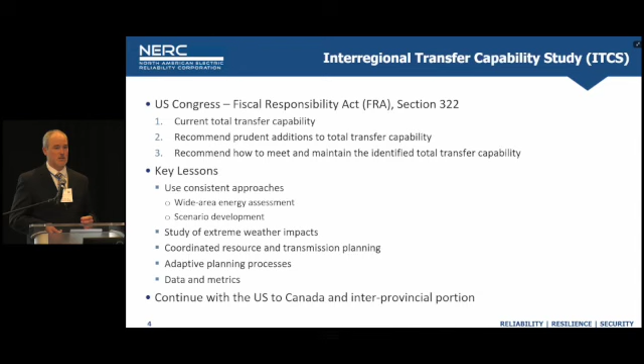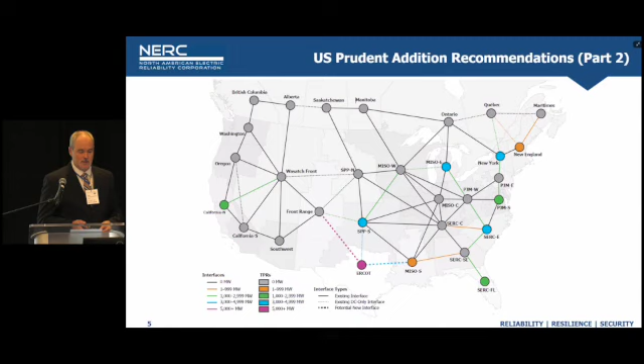Let me jump back where I should have started. This past March, NERC, in conjunction with Section 6, the Power and Energy portion of the National Academy of Engineering, held a workshop with about 50 leaders throughout the US, Canada, as well as Europe. And the key point was to look at energy adequacy for transmission and resources.

It was very good, a lot of good presentations, a lot of good technical information, but we received perspectives on the obstacles that those leaders have in managing all the components of the grid, not just the planning and the things we do in our daily work, but understanding the bigger picture.

Out of that workshop came 9 actionable items or recommendations, and they're very key points. Some of them are sort of closely related, but basically it's very similar to the interregional transfer capability study, in that you have to have some consistency. You've got to make sure planning and the resources and transmission actually talk. And then look at the duration and magnitude of load loss when you do the planning.

A lot of you in the room may be familiar with the loss of load expectation, the 1 in 10 criteria. It's a good metric. It's relevant. It's still there. Still should use it. But it's really not sufficient in today's world when you have the uncertainty in resources. You have to look at other items like the expected unserved energy and also the normalized version of that, which looks at total load for an area. Those give you other ways of measuring and understanding what the potential for load loss is.

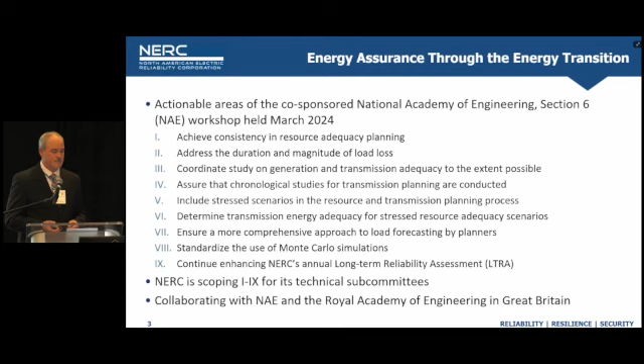Lastly is the IBR, or Inverter-Based Resource Initiative. I spoke on this last year as well. It's well underway. The main reason we're doing this particular initiative is because it was revealed that traditionally, historical resources met 97% of the total resources under standards, the nameplate capacity. Flip the coin to the IBR side, and only about 84% of the nameplate capacity had to pertain or be mandated to use the standards.

The registration we're doing under our NERC rules of procedure is going to allow us to register what we're calling Category 2 to be applicable to the NERC standards. That's underway. We're identifying, and we'll begin registering later, mid-2025, and then have everyone fully registered by the middle of 2026. There's a lot of good work there.

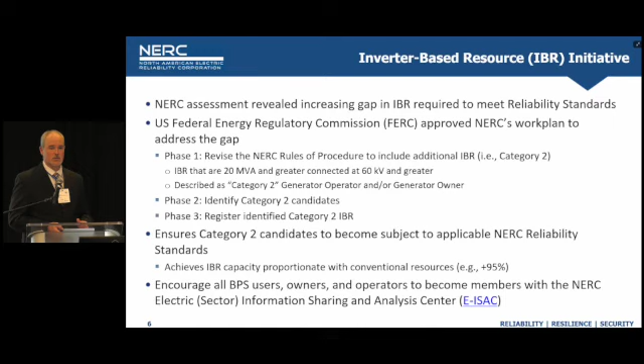I'd also like to put a plug in for our Information Sharing and Analysis Center. You can be members of those. It's voluntary, there is a charge for it, but it gives you a lot of information on threat intelligence.

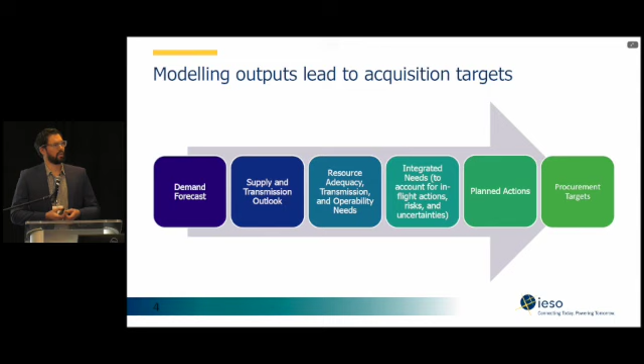Those result in planned actions, which is essentially a shopping list for the characteristics of resources that we need, and then they lead to procurement targets through a series of resource agnostic acquisitions.

So the first challenge that we have with acquiring new resources to meet our needs is right-sizing them. On one hand, you can overplan and have a very reliable system, but it's going to be expensive for ratepayers. We're also obligated to minimize costs to Ontarians for their electricity.

So we balance cost and reliability through a cadenced series of procurements that really captures the idea that nearer term, you have a much better idea of what's happening in your power system, and as your models go out longer and longer term, the uncertainty increases.

So moving backwards chronologically, we have our longest term acquisition targets. That's for greenfield development of new resources. We set targets for how much we would want to acquire every few years or so through the long-term procurement mechanism. We had our first long-term procurement where we acquired about 3,000 megawatts of storage.

And then looking forward at actually tomorrow, there's going to be a stakeholder engagement session on our second phase of long-term procurement, if anyone's interested in attending.

Then as we get closer to the operating time frame, we have our medium term procurements. This is largely looking at extending the life of existing resources, whether that's through upgrading the resources or accepting the resources as is if there's economic life beyond their initial contract life.

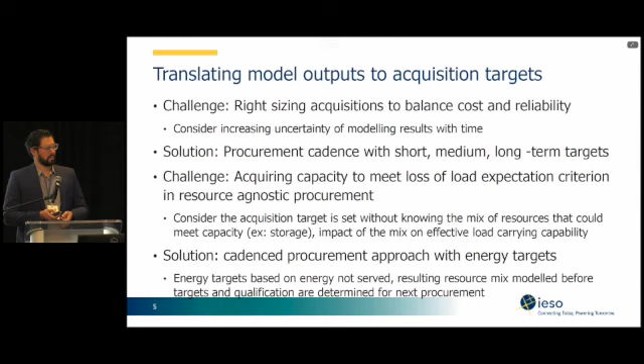We'll shift a little bit nearer term to the operating time frame. So we're still about 18 months out. This is the time frame that we look at for our outage management planning.

And this is where we see a lot more of the practicalities of climate change uncertainty, and understanding what the system looks like when you stress test it with certain conditions. So from when the Ontario market opened until about seven years ago, we used to look at a deterministic analysis of here's our load, here's the supply we have to meet our load. We had two scenarios: a normal weather scenario that looks at median weather and median hydrology conditions, and an extreme weather scenario that looked at extreme weather and what the hydrology conditions look like under extreme weather.

At the time, we didn't have significant solar and wind on the system, but since then we've added more significant solar and wind resources. So we used to approve outages based on whether or not there'd be enough resources above requirement for that normal weather scenario.

And then we transitioned to looking at the extreme weather scenario to capture a lot more of what can be happening on those peak days, especially during the summertime when it might be a really hot period of fairly dry weather that we tend to get in Ontario during the summer, and you may have issues with your hydroelectric resources simultaneous to increased demand from space cooling. So we shifted to looking at the extreme scenario.

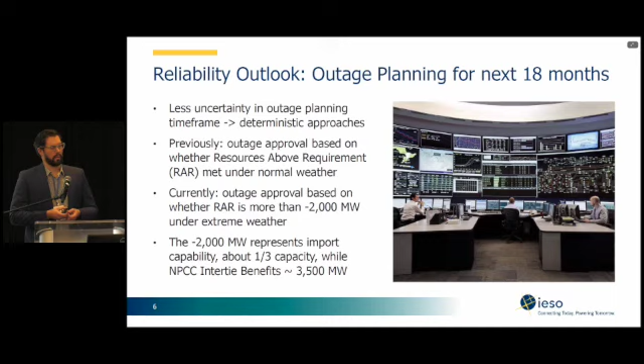Thank you, Mike. So during my presentation, I saw a few heads shake about loss of load expectation. How many planners do we have in the room? Few. Okay, great. So you can relate to what Mike was covering, right? Yeah. Okay, excellent.

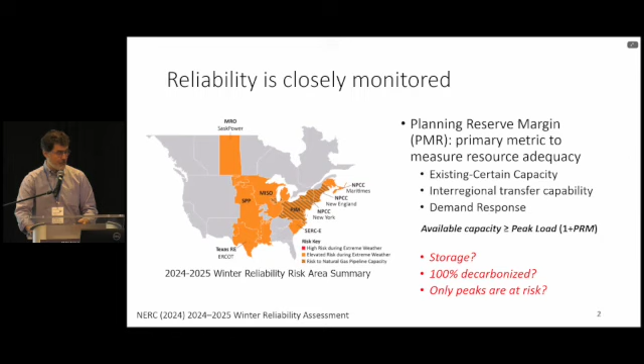In our study, we're actually not looking at just peak loads, because in a decarbonized sector, it's not only for the peak loads we want to have additional capacity. It could be for other times where you may have less of the variable resources. So during these non-peak hours, do we still have reliability? Because if you have fluctuating variable renewable energy capacity, then you may also have some issues meeting your load, even if it's not the peak load, because you have low resources. So that's why we are looking at that. So our approach is linear deterministic, but we're looking at the full 8,760 hours of the year.

So in a way, it's like a Monte Carlo analysis where you have so many cases, but for each hour, we want to make sure there's enough capacity to meet load. We include all 5 larger regions of the NPCC. So we have, again, 8,760 hours. We also have hourly wind and solar profiles for every region, so we use them as deterministic, but again, we have the full real fluctuations of generation from wind and solar in all 5 regions.

And then we can invest in generation, interties, storage, demand response. But we don't have unlimited capacity to invest. There's only so much we could add. So we do have upper bounds for our investments, which I think is key to understand because, of course, if you can invest an unlimited amount, then maybe the model works. But in real life, it's not true that you can build an unlimited amount of anything.

And we do operate Quebec's hydro systems with storage. Of course, that's included, and it's very helpful in many instances. And we do allow for natural gas, but 100% decarbonized means that it's either renewable natural gas or natural gas with CCS with additional costs, but we do account for that.

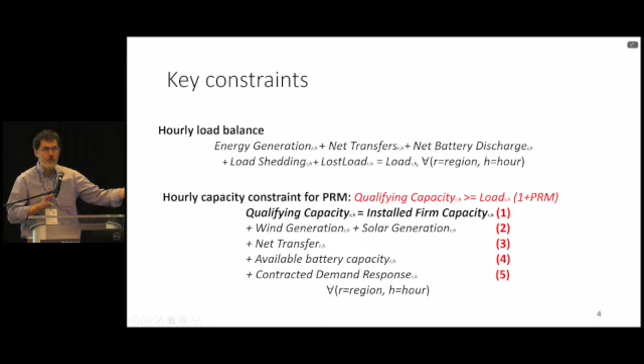What we're using in our study is basically the real hourly generation from wind and solar. So whatever is produced in one hour can be used. So it's like if we had perfect foresight of the full year, and when it's fully working, we're using 100% of the capacity. If it's not working, then it's 0. So it's fully fluctuating across the year.

Net transfer: we don't model a firm capacity for interties. We also look at what if we could know exactly how much would be coming in an optimal system. We count the net transfer between regions as being qualifying capacity.

And we use battery capacity, but for battery capacity there are two criteria. The energy has to be in the battery and the discharge capacity has to be there. So we use the minimum of the two amounts, the amount of energy that is available or the discharge capacity of the battery, so we are sure that there is energy if we count it. And the demand response, the contracted demand response that I showed you.

So basically we're running different scenarios in different ways. So it's really interesting what's happening with these slides. It's a mystery to me.

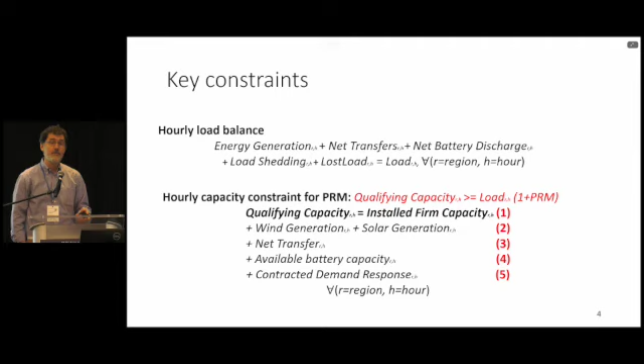So we're running scenarios where what counts as qualifying capacity evolves. In some scenarios, we only have the base case, where just the firm capacity counts. Then we have scenarios where transmission counts, where storage counts, and where demand response counts. So in the scenarios we're analyzing, we're adding different levels of these qualifying capacity tools. These are the flexibility mechanisms that we can add and include in our analysis.

And then we're also putting in three different large categories: can we add more natural gas? Can we just freeze natural gas capacity where it is now? Or, as some people sometimes claim, should we get rid of all the natural gas? Because in a decarbonized world, maybe we shouldn't have any natural gas power plants.

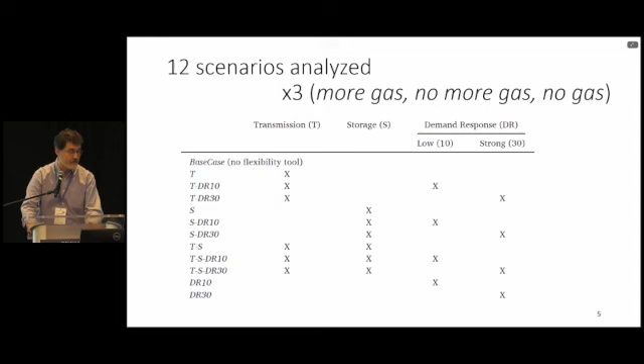So we are doing all these kinds of cases. And what we find is that you cannot reach some reliability reserve margin in some scenarios. So if you basically don't allow any of the transmission, storage, and demand response in your system, even if you add the maximum amount of natural gas power plants, you cannot get the reliability margins that you are looking at just with the base case.

So basically, there's not enough capacity in natural gas to offer you the reliability margins you want to have. You need to include some transmission or some demand response and storage. And of course, ideally, and that's the two lines with the full green under all scenarios, you can get up to 30% reliability margin, but only if you have transmission, storage, demand response in your tools

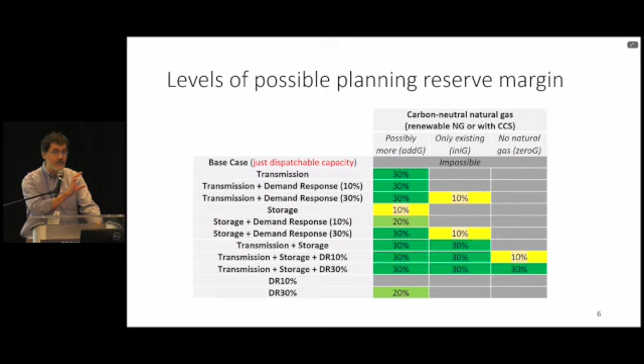So of course, if you add natural gas, the cost drops to a much lower level, and these are the kinds of levels. So this is a zoom to the lower levels. When you can add natural gas, you have costs that are around 180 billion per year, but that would mean adding only natural gas without the other tools, beyond what is acceptable in our model. So that's why it's written, we would need 97 gigawatts of additional natural gas power plants in the region to be able to meet our reliability margins only with natural gas power plants or only with firm power plants.

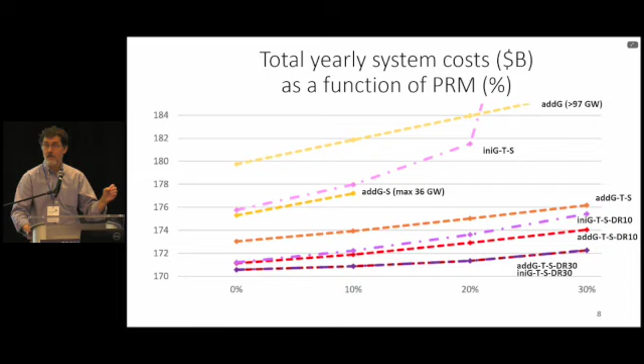Hydro is included there. And as we want to lower the cost, we need to basically have natural gas, but essentially more counting transmission, storage, and demand response. And the more demand response you have, the lower the cost to achieve your reliability margin. And that's basically a big call to increase the flexibility of all users in the system to reduce their load, because unless you have that flexibility, you don't reach your reliability margins as you want.

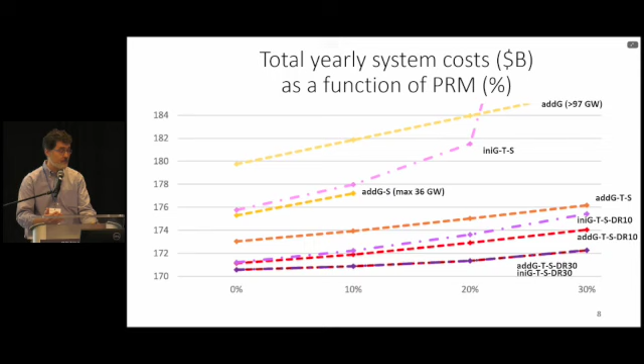So just to conclude, flexibility resources should be viewed broadly for reliability purposes. We need to include transfer capability, storage, and demand response. The three of them are very important to have. And if you don't include them, then basically your costs are going higher. And if you don't include your neighbors, then of course the costs are also going higher.

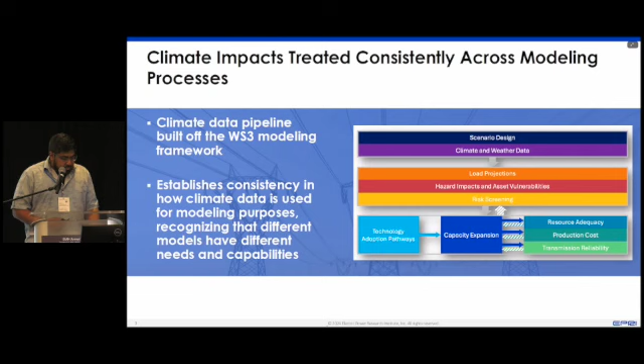The first step in a planning process is typically scenario design. Scenario design is defining the assumptions of how key uncertainties may evolve over a future. Typically, scenarios that people consider are techno-economic uncertainty, supply chain uncertainty, fuel supply, and policy demand.

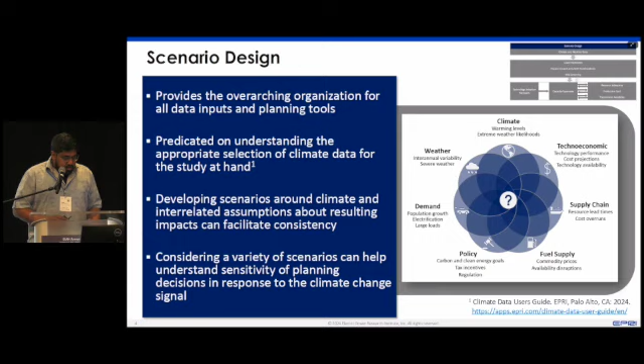One way to think about including climate data is just treating climate and weather data as additional scenarios on top of your existing scenarios. This does increase the problem space, and we'll talk a little bit about the consequences of that.

When you take into consideration this kind of climate data, you're considering meteorological and climatological conditions, such as temperature, precipitation, humidity, wind, and solar irradiance. For future projections of this data, that can include weather forecasts, extrapolated historical trends, and projections based on global climate models.

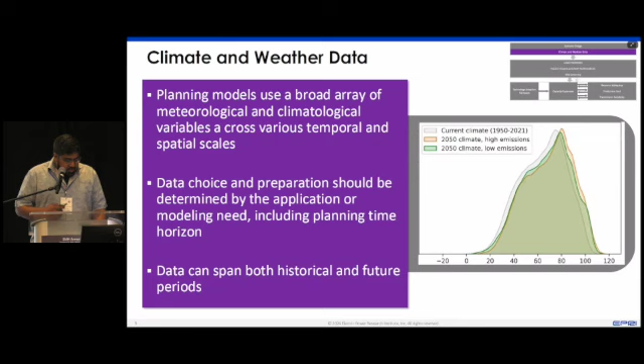Generally speaking, there are 2 kinds of transformations you might want to perform across different models for climate data: spatial transformations and temporal transformations. The outputs of one model are fed into another model, so you want to make sure that the transformations are consistent across different models.

For these kinds of transformations, if you have highly granular data, you're upscaling the data, or if you don't have enough resolution, you're sometimes downscaling it to make sure you have enough information. There are some trade-offs here as well. If your capacity expansion plan does not take into consideration a nodal model, then it may not make sense to include climate data at a nodal resolution or at each weather station. So it depends on the resolution of the various other models involved as well.

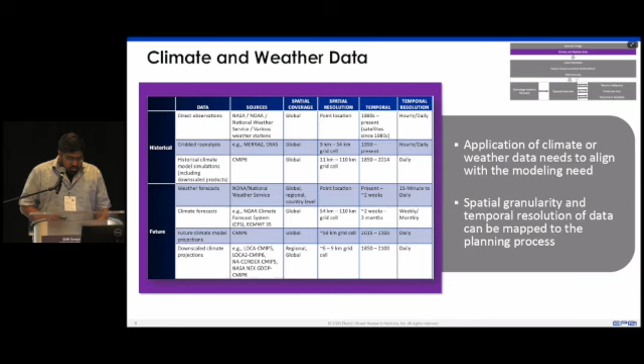Once we have this kind of transformation pipeline set up, we have to start identifying what extreme weather events are. This is the first step, and it's highly system dependent. In Texas, for example, an extreme weather event is high temperature, but this is system dependent. A gas turbine in Texas may have high temperature as its extreme event, but that same gas turbine in Ontario might have a very low temperature as its extreme event.

There are weatherization measures you can perform on these different assets to make sure they're not affected by these extreme events. So we want to identify what these extreme events are, and defining what an extreme event is is still something that the community is kind of forming. What we've done here is identify some thresholds based on magnitude, intensity, duration, frequency, spatial coverage, and even occurrence.

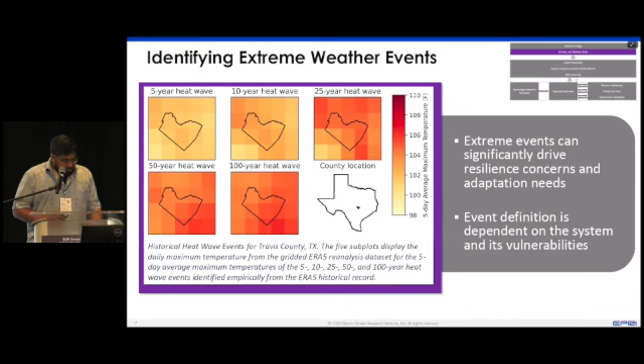So now that we've identified what an extreme event is, we can start pulling that climate data into our models. The first step is typically load projections. Most of the time, load projections are based on historical data or weather normalized conditions. But let's say hypothetically you had a bottom-up model that captured projections of end-use technology.

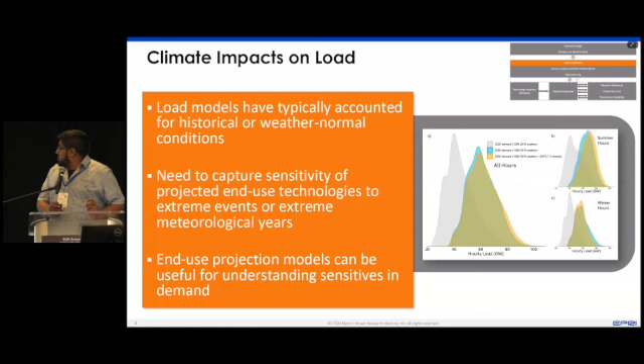So the next step, after you have these load projections, is typically to identify, given some extreme event, how that affects the various assets on an electrical grid. There are transmission system assets, transmission lines, and generation assets, different generators, and there are various vulnerabilities that different types of generators might encounter.

For example, a solar panel in heavy snow conditions might just have a cover of snow, which can take its generation down from 100% of what it could generate down to zero. In Texas, for example, higher temperatures can end up derating plants, meaning you may not be able to run them at max capacity.

I think Pierre had an equation showing the installed capacity or the capacity available. Imagine that equation, but now the capacity available in your capacity expansion plan is not as much as it could be because of some extreme event, since your generators have been derated. So you may not be able to meet your reserve margin because of that.

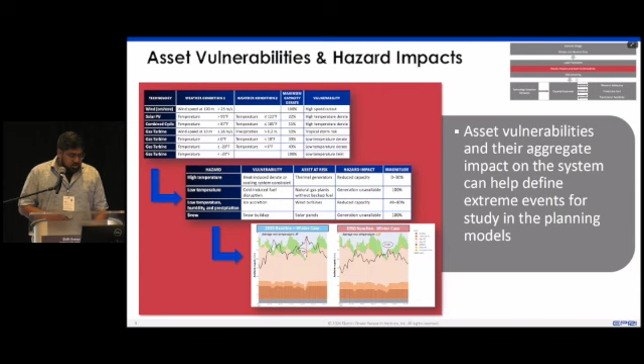With this kind of additional scenario, you may blow past your computational budget for solving this type of problem. That's where we've introduced risk screening — basically identifying key periods where the system is more likely vulnerable to not being able to meet the load given some supply based on weather conditions. This is somewhat like a resource adequacy model, but it uses weather data to determine whether these generators, if derated, are still able to meet the supply.

This is just identifying the period. You can see in the graph at the bottom left, there are all the weather scenarios, but on the right, there are some key time periods that have been highlighted based on the outputs of this risk screening model. These key time periods can then be used in your capacity expansion model or resource adequacy model to make sure your system has the supply to meet the demand in those time periods.

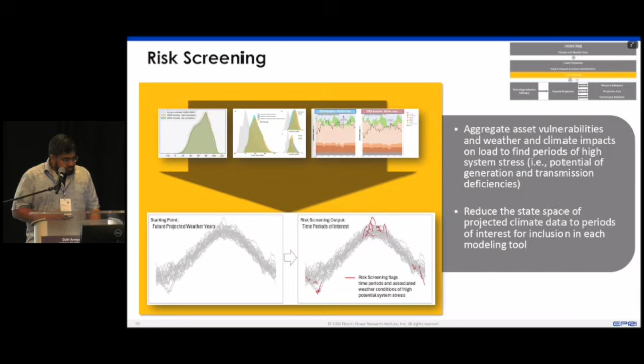Once you have this screening model that identifies these high-risk periods, they can be passed into the investment planning model, the resource adequacy model, and the production cost model. You can see again at the bottom of this graph those key periods — for the capacity expansion plan, you might only take into consideration a subset of that. But for resource adequacy, you want to consider as many scenarios as possible to make sure you've covered a diverse range.

You might run your production cost model at a higher fidelity, and that could give you better results about how the climate data affects the system.

In summary, having climate data that's consistent across these different models is important, and identifying what the extreme events are for the particular system is crucial because they're all highly system dependent. Understanding how each asset can be affected by climate data or these extreme events is also key. Finally, identifying those key risk time periods is what makes this problem computationally tractable.

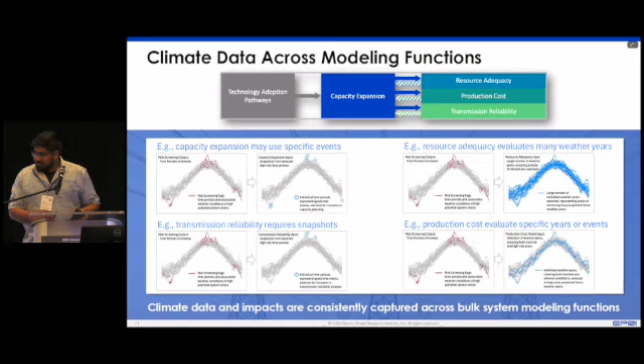Thank you, Deepak. Definitely shows some areas of risk that are not where you'd expect them sometimes.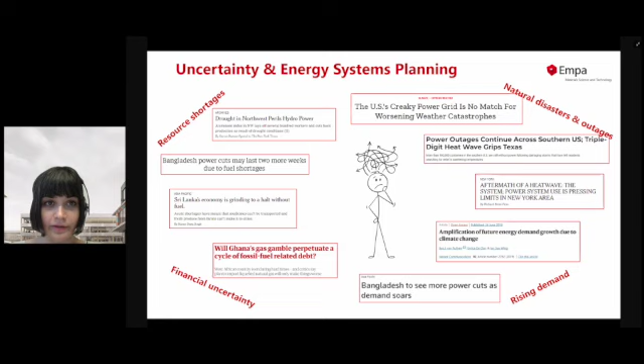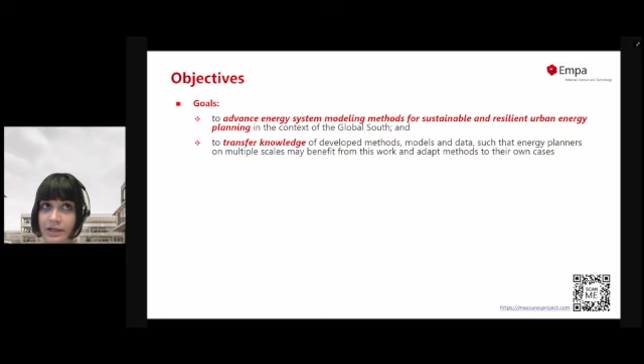The objectives of this project, called the Measures Project, which is about transforming our modeling approaches for more resilient and sustainable planning, is to develop these methods. We looked at it in the context of the Global South, given the climate vulnerability of communities, especially coastal communities, like the case study I'll show you today. But in this project, as I mentioned, it's meant to be transferable methods. We're creating general frameworks, and we wanted to transfer the knowledge, methods, models, and data we developed to energy planners worldwide so they can also benefit from this work.

What we focused on in this project is representing factors that are not typically well covered in the scope of energy system optimization models for long-term capacity planning, looking at socio-technical factors, techno-economic factors, climate change impacts, and overall how to improve resilience.

Specifically, we looked at things like extreme heat, flooding from the climate change perspective, and changes in hydropower. From the economic perspective, we looked at something called the informal economic sector, an economy that operates informally, with figures not officially accounted for in GDP, and how that affects your energy planning. We also looked at currency depreciation and how it affects planning, suppressed energy demand, power system failures, and all sorts of things.

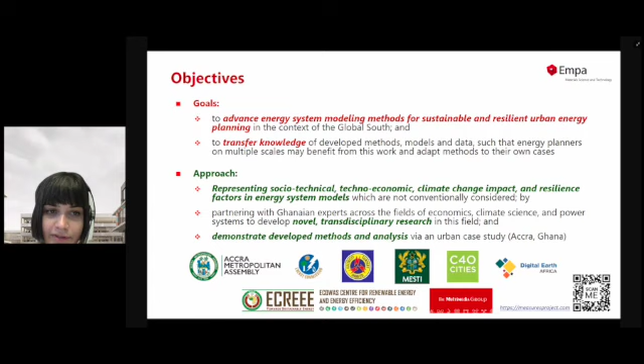We worked with a very transdisciplinary group of researchers across economics, climate science, and power systems, and we were the energy modelers in this case, developing these methods. We collaborated with a whole number of different organizations and research institutes in this project. Our workhorse for this was building a model for our case study area, which was in Accra, Ghana, which I didn't mention very clearly, I think.

So we were working on this case study, and here we used OSeMOSYS, which is an open source, open access modeling framework that some of you may have heard of before. The spirit of this project was to be open in nature, so we used this open access model, which built a model from 2020 to 2050.

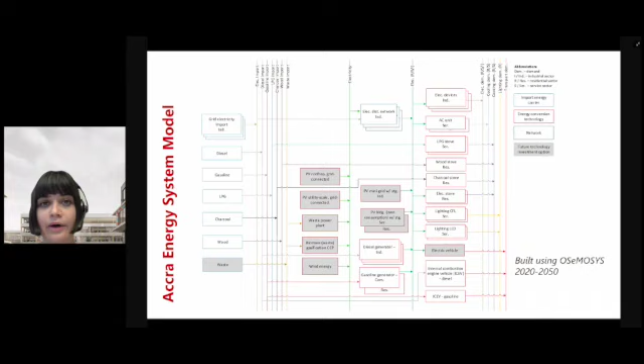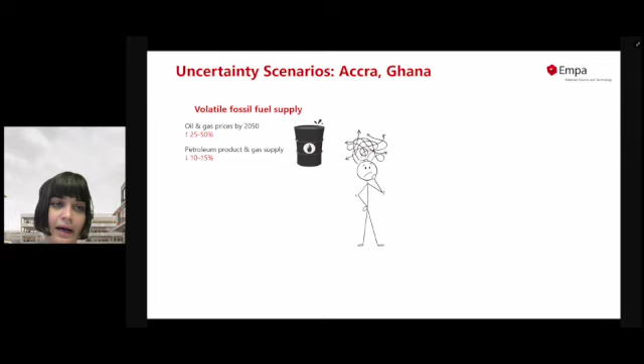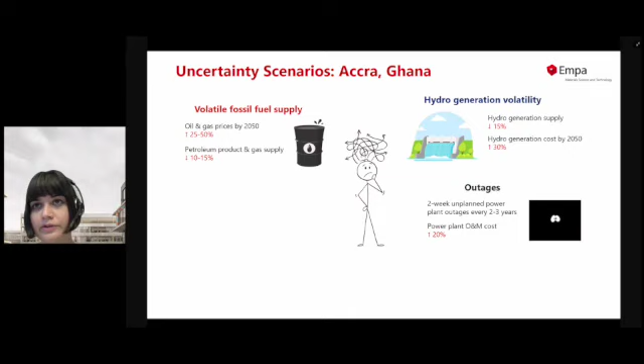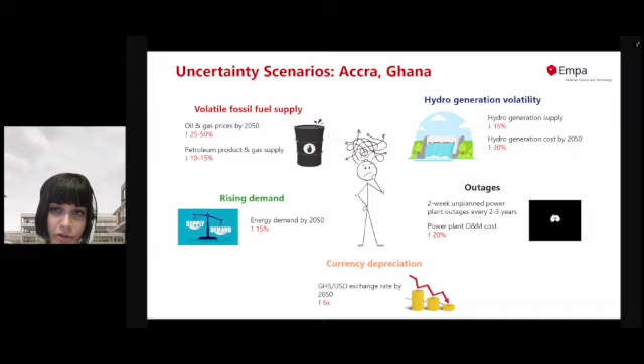We looked at this time horizon until 2050. Particularly for this, the uncertainty scenarios we looked at for the case of Accra were volatile fossil fuel supply based on historic trends, and volatile hydro generation, which is more applicable in the case of Canada and Ontario. We also looked at unplanned outages, currency depreciation impacts over time and how they can affect long-term planning, and rising demand because of things like increasing cooling demand, or rural-urban migration under different climate change scenarios from the IPCC.

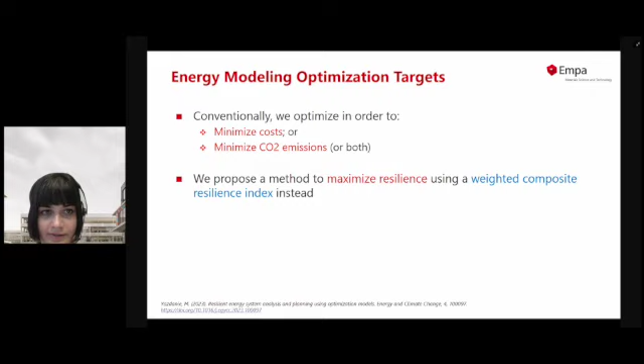What we did in this paper is we proposed a method to maximize resilience instead as an objective, using a weighted index. That weighted index considered different factors of resilience: looking at the balance of generation across different technologies, your security of supply based on your resources, the level of decentralization you have, the variety of technologies you have, the redundancy you have in a system, and the efficiency and CO2 emission reduction as well, which is more of a long-term sustainability and resilience target.

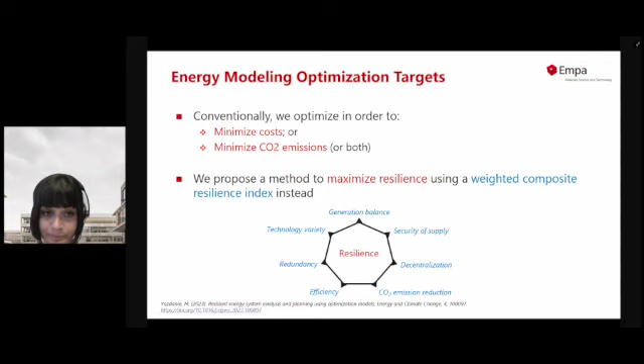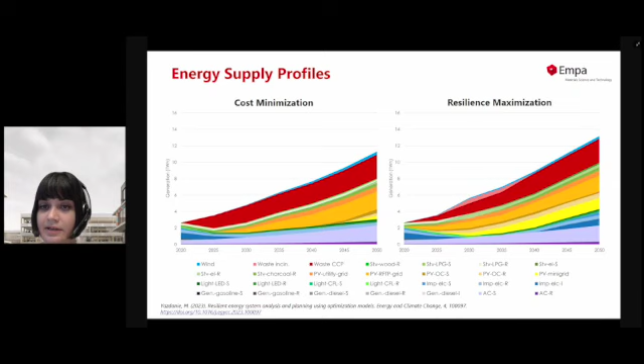Here, in one snapshot, I show you what the cost savings are of our resilience-optimized system compared to the cost-optimized system, looking at an uncertainty scenario in a given year of 2050 and what it would cost. On the far left side, you see the total system cost is about 40% more expensive to design the resilient system, but that's over the entire lifetime from 2020 to 2050. The other five bars show what the costs would be in one year when you have different shock scenarios, like the volatile fossil fuel demand increase, outages, and when you have multiple shocks causing cascading effects.

In one year, we have a cost savings of about $4 billion US, which covers more than the entire cost of the investment of the system. So one of the key messages here is it's worthwhile designing a system for resilience, even if that doesn't appear cost optimal when you just look at a cost-optimal objective. In reality, it can save you a lot of money. This is just a snapshot of one year, so you can imagine over several years of uncertainties what the cost savings might be.

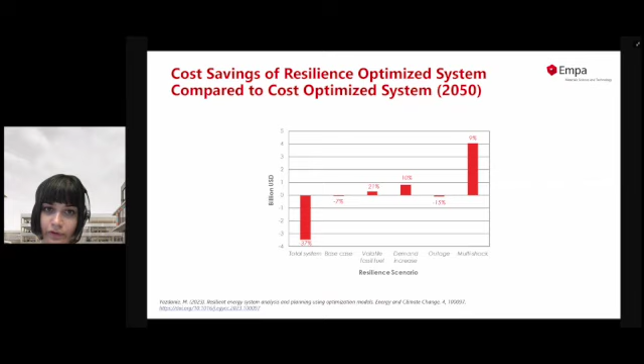That's one paper, and I'm going to quickly show you a second one, which is on strengthening energy system resilience planning by using a concept called regret. Here's another open access paper you can also have a look at.

I don't have much time to go into the mathematical definition of regret, but I think it's a feeling we can all relate to. In decision making under uncertainty, there's a way for us to express that mathematically.

We identify something called a loss function, which is essentially the cost of a system subject to a given uncertainty scenario, like volatile fossil fuel prices. It's the difference between that cost and the best possible cost I could have achieved if I had designed another system, knowing what that uncertain future was going to be.

So knowing that I'm going to run out of fossil fuels in, say, 5 years from now, what would I design as a system then? That difference is what we call regret. If you made the best decision, you'd have zero regret. If you didn't, you'd have some amount of regret, defined mathematically this way.

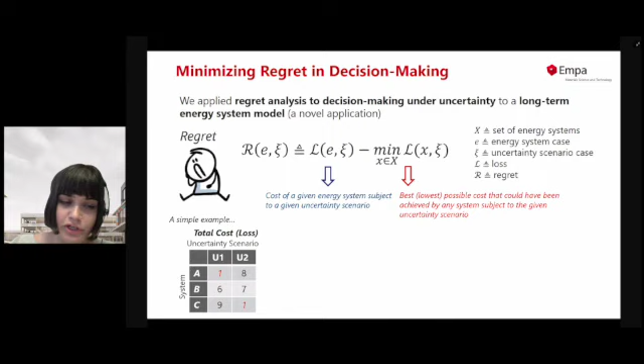In a simple example, if we have 3 systems, call them A, B, and C, and 2 uncertainty scenarios, we can calculate our loss for each of these. This is our total cost for each system subject to each uncertainty scenario. We can calculate the regret by taking the lowest possible value and the difference between the other costs.

Now we have to decide what kind of system we're going to make. There are two ways: one is if we design a system that's optimally robust. In that case, we look at what the maximum regret is across all these different systems, and we want to minimize that value. So in this case, system B gives us the minimum maximum regret, and that's our robust system.

Otherwise, we can also have a stochastic solution, which would assign probabilities to these different scenarios. So U1 and U2 would have some values, and we end up with a different system here - it's just a simple average. You would go for system A if you're looking at probabilities of these uncertainties.

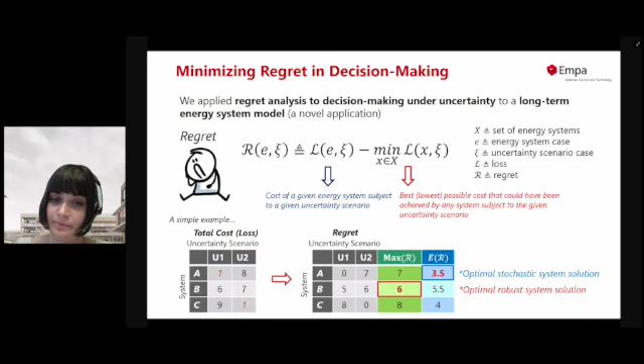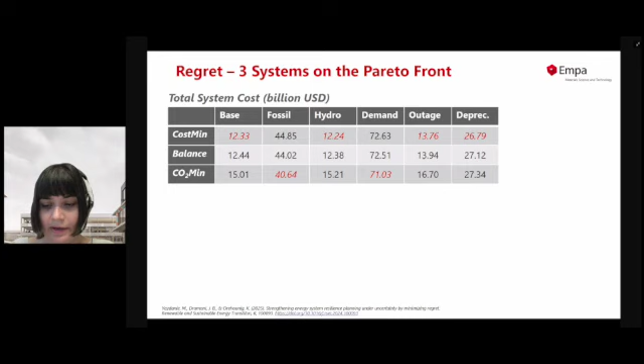We applied this to 3 different systems we could have designed from the energy system perspective: one cost minimal, one CO2 minimization, and one balancing both. Again, on the horizontal we have different uncertainty scenarios. We calculated the regret, and then found that the optimal robust decision would be a CO2 minimized system, and also found the stochastically optimal decision.

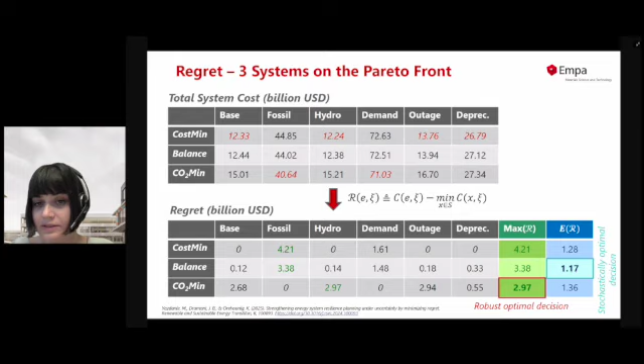I'm doing this very quickly, just a 3-minute overview, but we had many other variations of this. I just wanted to give you the take-home messages from this.

Overall, it's very imperative for us to improve our energy system modeling methods to have better foresight and encompass socioeconomic and climate change uncertainties that will arise in the future. If we assume perfect conditions, as we often do in our models, we'll end up planning systems that are suboptimal and result in higher costs in the end.

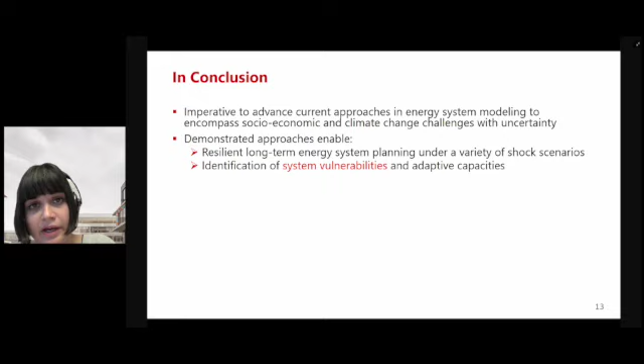Some of the methods we demonstrated in this project show that we can plan better for resilience under a variety of different shock scenarios, which would be defined for the given geographic context. Through this process, we can identify what the system vulnerabilities are and what our adaptive capacities are of a system.

We see that there are significant impacts of considering shocks on resilient urban energy system planning, and that if we consider them in advance, there are dramatic cost savings that can be gained by planning for resilience. In the particular case of Accra, we saw that waste, combined cycle plants, solar photovoltaics, and electrification of transportation are very critical in its transition for sustainability and resilience coupled together.

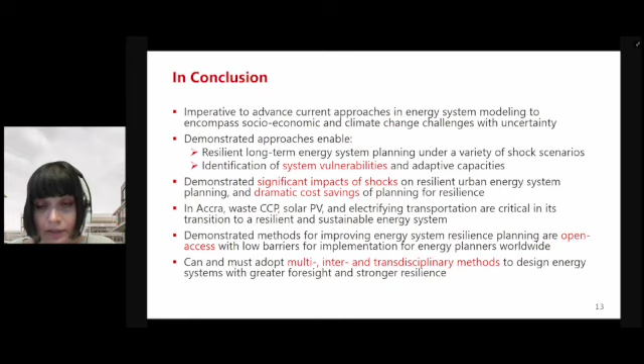The methods are open access, open source, and meant to have low barriers for implementation for energy planners worldwide. I hope they'll also be useful in the global north as well as the global south. Overall, one of the key messages is that we need to work better in inter and transdisciplinary approaches to tackle these problems with greater foresight, so we can actually plan for genuinely more resilient systems in the end.